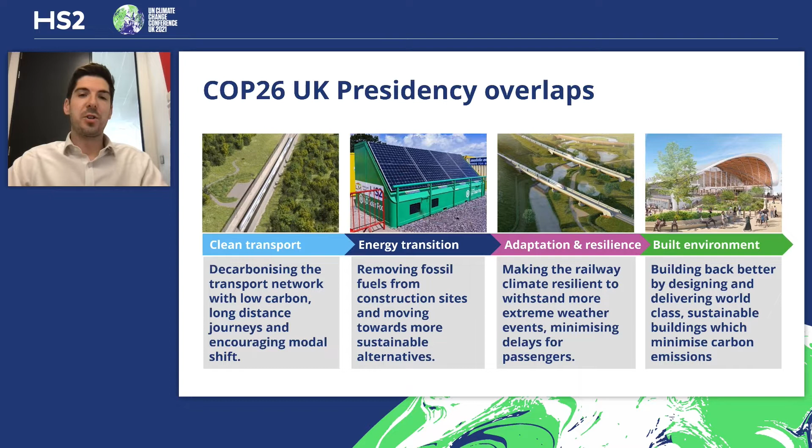HS2 and our partners are innovating in all of these areas, becoming industry leaders and an exemplar government project. And today, we're going to be focusing on how HS2 is helping with the built environment agenda. Because like I said, today at COP26, that is what's taking centre stage. And as you can see, the UK presidency's goal is to take action on sustainability in our cities and regions.

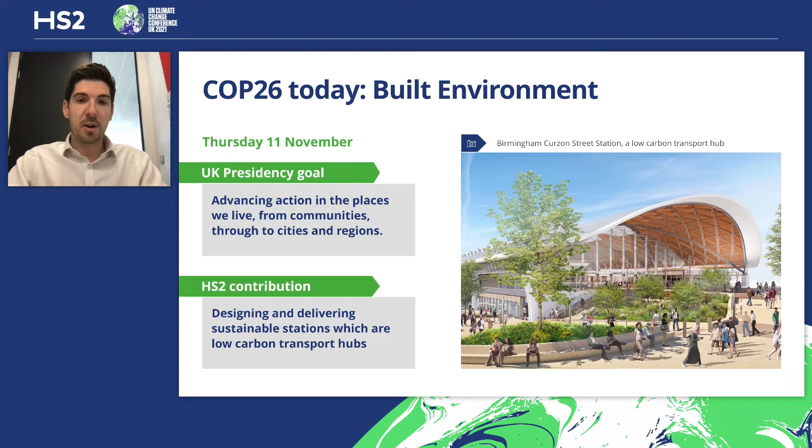We're building a number of new stations along the phase 1 route and redeveloping others along phase 2. HS2 stations will be the regional front doors to the new high-speed network, and they will catalyse improvements to local transport networks, which will link in with the new railway. They've already won awards for their environmentally friendly design, and we'll hear more about that today.

I now want to introduce our panel. Joining HS2 Limited will be Midlands Connect, Mace Dragados and Arup. It's now time to hand over to them, so I want to introduce our Phase 1 Stations Director, Matthew Patel.

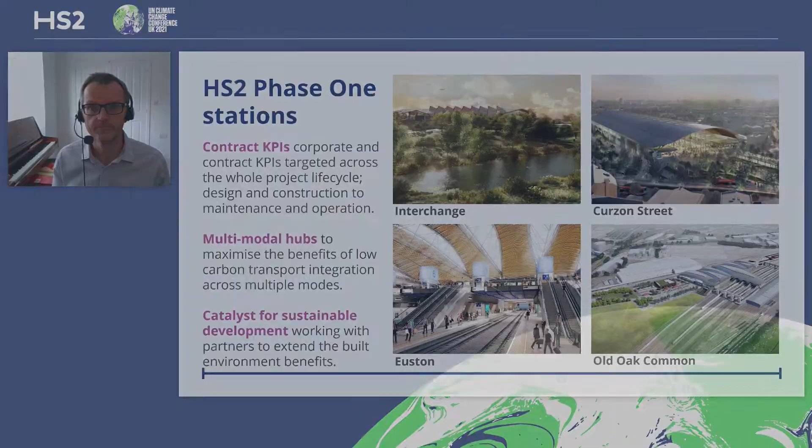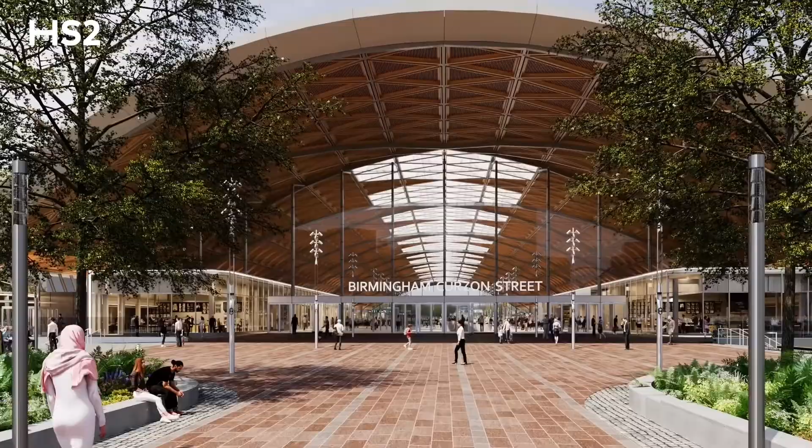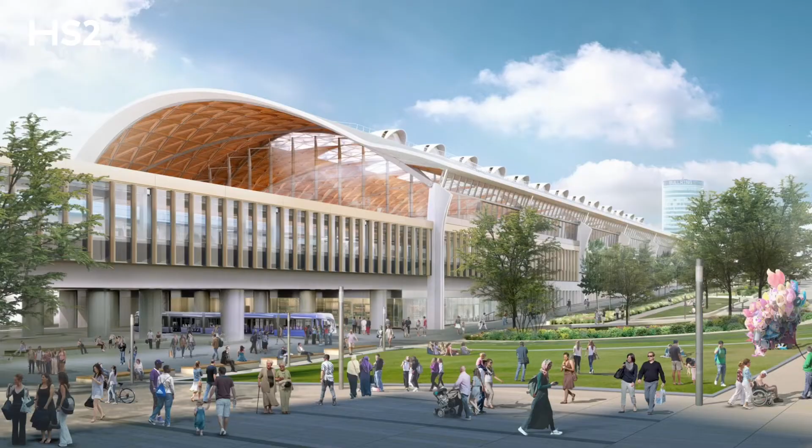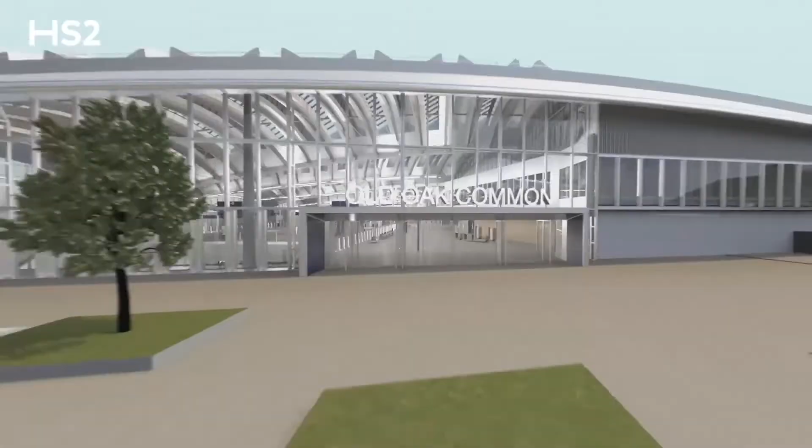HS2 will become the low-carbon backbone of our transport network, and our stations will be amongst the greenest in the world. They'll connect with walking, cycling and public transport routes, encouraging low-carbon travel across the country. As part of the Curzon Street station design, we've given careful consideration to cyclists by adding dedicated cycle access points, and at our Interchange station, we'll include electric vehicle charging points. The stations will improve access to other modes of low-carbon transport, with the Midland Metro running alongside and underneath Curzon Street Station, as well as cycleways, pedestrian routes to local and rapid transit buses and other train services. Old Oak Common Station in London will link with the Elizabeth line and other regional services taking passengers to Heathrow and central London and trains to Wales and the west of England. When passengers choose HS2, they'll be choosing a low-carbon way to travel.

Good morning. My name's Laura Kidd and I'm Head of Architecture at HS2. I'm not going to be talking much about the specific station designs today, but sharing HS2's BREEAM story.

So, what is BREEAM? BREEAM stands for the Building Research Establishment's Environmental Assessment Method, and it's one of the world's leading sustainability assessment methods for the built environment. It provides a rating scheme that awards points for a building's sustainable performance against set criteria across 10 assessment topics. These topics reflect environmental, social, and economic issues.

We've selected BREEAM at HS2 because it's a worldwide recognised and third-party assured tool, and it demonstrates our sustainability credentials to our stakeholders. It also challenges our supply chain to raise environmental benchmarks and set new standards in sustainable development.

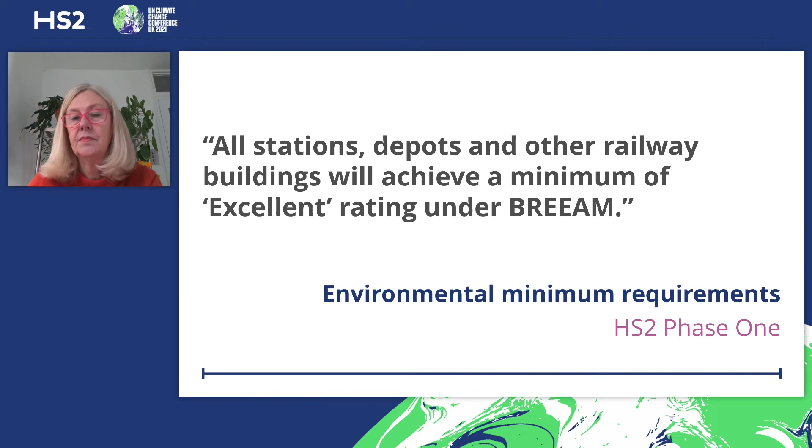For example, evidence for materials covers the specification of low-impact materials, the efficient use of materials, and responsibly sourced materials. Additional credits can be gained for innovations that bring sustainability benefits that go beyond current best practice. A building can be assessed at both design and post-construction stage. The design stage assessment is labelled interim, with a final certified rating coming after the project is complete.

The BREEAM scheme has got 5 ratings from pass to outstanding, depending on the overall score achieved. The outstanding rating puts a building within the top 1% for sustainability performance, with excellent rating, the HS2 minimum for all our buildings, representing the top 10%.

In the early days of the project, HS2 worked closely with BRE to establish a bespoke set of criteria for the station buildings. This doesn't mean that they're easier, but it's enabled BRE to include criteria that are applicable and essential for sustainable station buildings. An example is the addition of credits for building legibility and wayfinding. These are crucial for the success of stations' accessibility and inclusivity requirements.

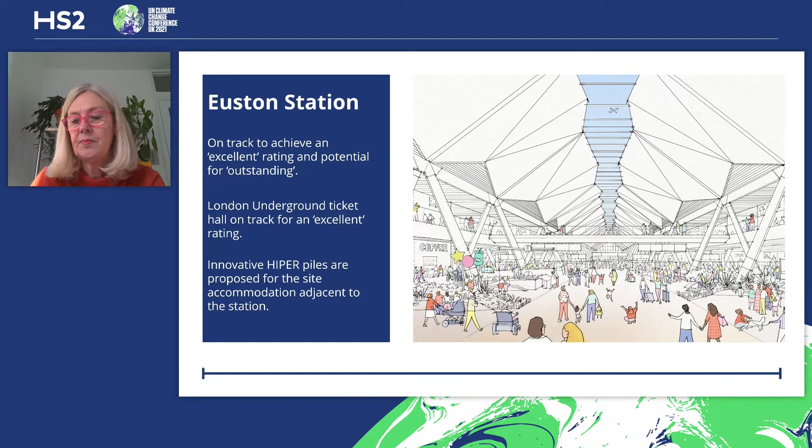Old Oak Common Station in West London has completed its scheme design and is progressing with detail design. The station will have HS2 train services below ground in a deep box, and these will be linked by an overbridge to the Network Rail and Crossrail or Elizabeth Line services. The designers have included many sustainable measures and are currently targeting an outstanding for their detailed design BREEAM.

There has been progress against HS2's 50% carbon reduction, with 43% reduction currently demonstrated, and further reduction opportunities are under assessment. The substructure redesign saved 5,600 tonnes of CO2 by reducing the number of piles from 387 to 161. The station specifies recycled and low-carbon concrete mixes, which reduces embodied carbon by 59,000 tonnes.

The urban realm design above the box, well, that's really exciting because it's a significant landscaped area with ecology enhancements, including a wetland common, wildlife planting, and the buildings out there will have green facades and roofs. It's going to be a great new place for the community and for the travellers.

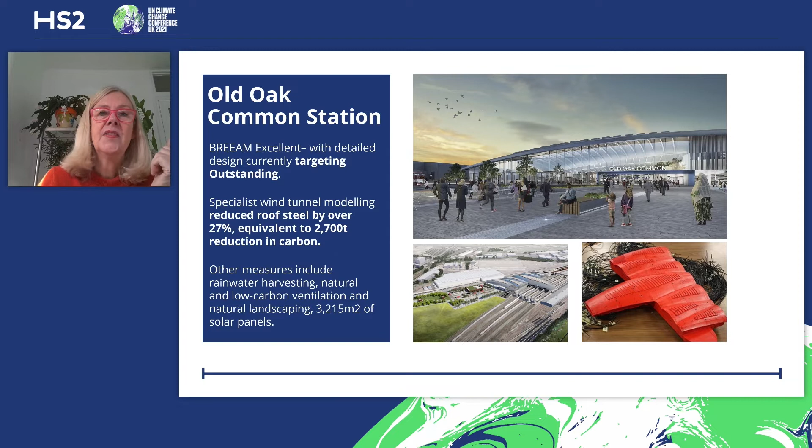The new Curzon Street station in central Birmingham is set to reduce carbon emissions by an unprecedented 55%. It will achieve net zero carbon emissions from regulated energy consumption and use a range of technologies to generate energy from renewable sources. The station will achieve net zero carbon emissions through reducing energy demand and consumption from building integrated systems, for example, by using LED lighting and generating low carbon energy through solar panels and ground source heat pumps. This station is also targeting outstanding for their design BREEAM assessment.

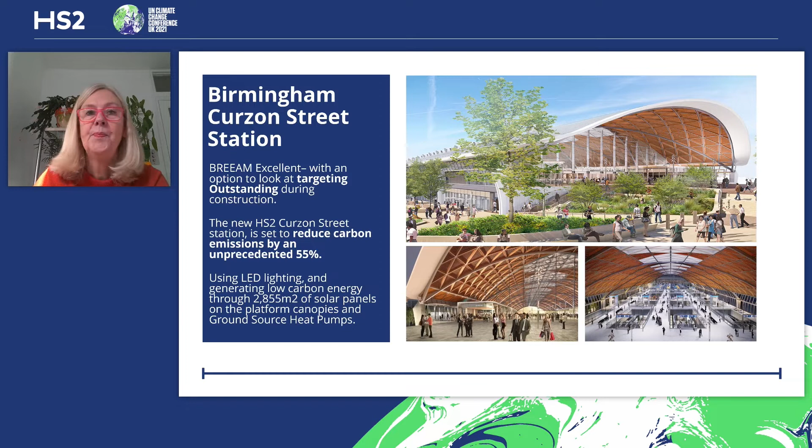Interchange Station, the HS2 station near Birmingham Airport, has recently been awarded BREEAM Outstanding certification at design stage, the first railway station in the world to achieve this rating, of which we're really proud. The green and blue design vision of the station has resulted in an inspiring sustainable design, and a fuller picture of sustainable developments at Interchange is on a following video.

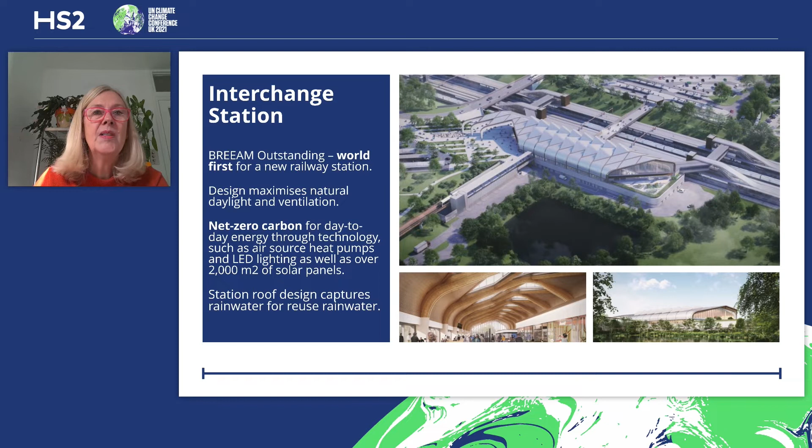So, what do you need for success? HS2 sponsors BREEAM at the highest levels through the environmental minimum requirements and HS2 sustainability policy. The targets and requirements are also cascaded through to all the contracts works information. You need to establish good supply chain management, pre and post engagement, and we have established a contractor-led BREEAM working group to efficiently deliver our BREEAM targets.

The continued engagement with BRE is also very important. BREEAM Innovation Credits and HS2 Innovation Hub, which the contractors work with to drive innovation through their delivery, have also helped us to drive innovation and BREEAM success. Now for that promised video about the Interchange Station.

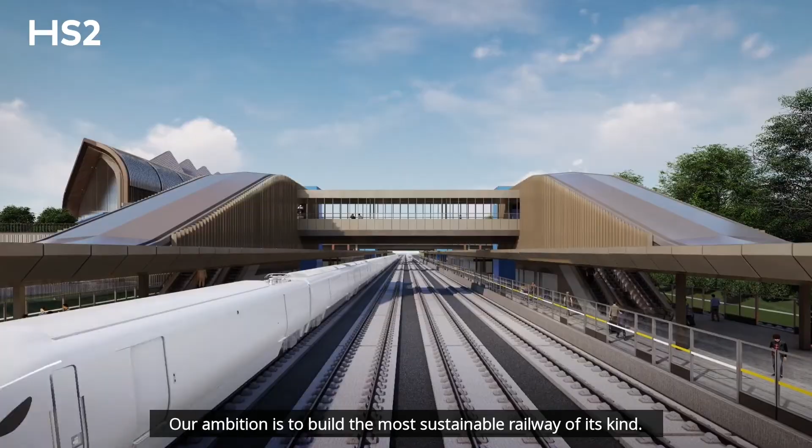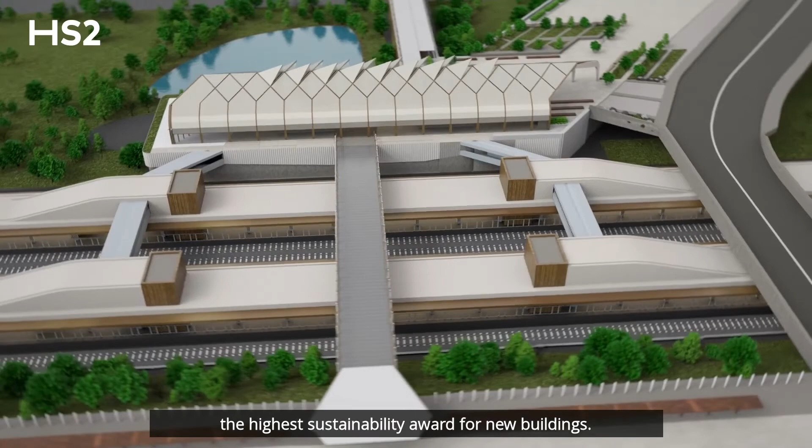Our ambition is to build the most sustainable railway of its kind. Our new HS2 Interchange Station, which will be in the West Midlands, has achieved the BREEAM Outstanding certification, the highest sustainability award for new buildings. This puts Interchange Station in the top 1% of eco-friendly buildings in the UK, recognising our commitment to protecting the environment.

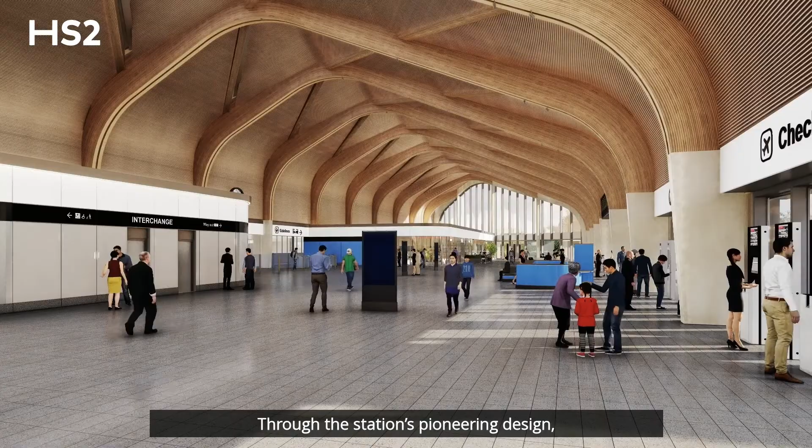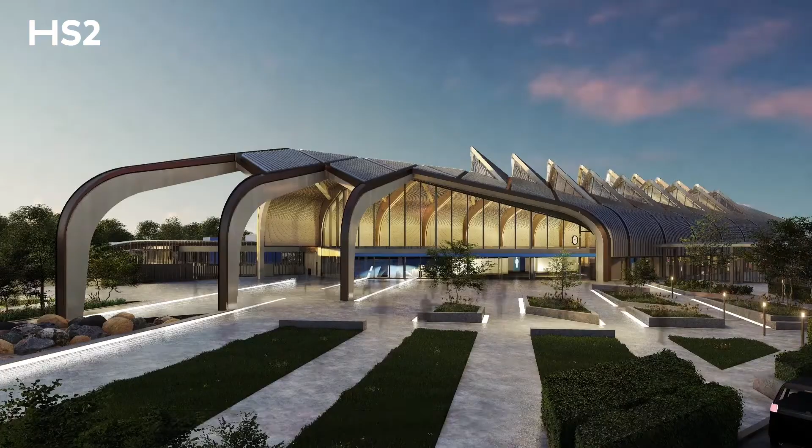Through the station's pioneering design, we've reduced the need for energy by using natural ventilation and daylight, and have included eco-friendly features such as a station roof design which can capture and reuse rainwater, energy-efficient technology, solar panels, and LED lighting, which will mean the day-to-day running of the station will be carbon neutral.

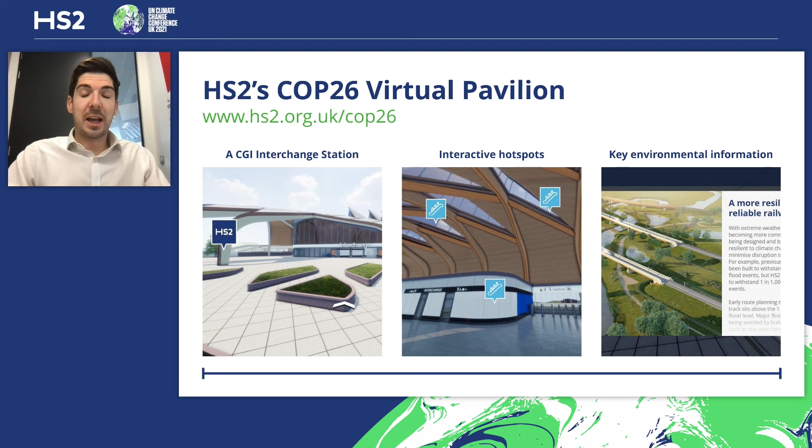I hope you've learned a little bit about how we're building sustainable stations, and I hope you'll join us again in the future. Thank you.